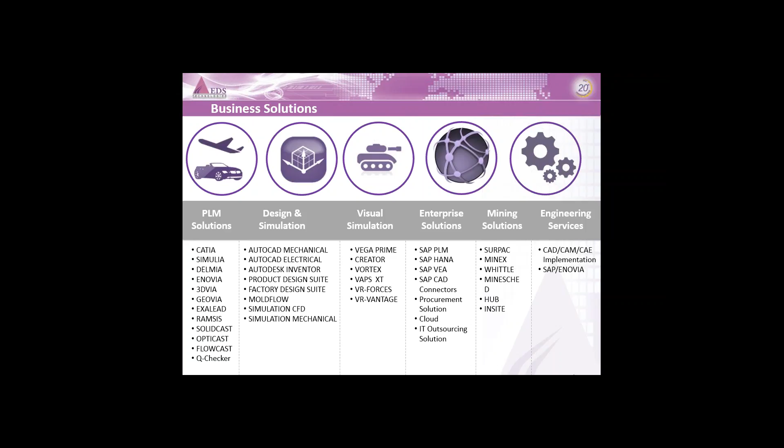We also serve different industry verticals like automotive, electronics, aerospace, heavy equipment, labs, medical equipment, space, and mining, etc. So we have strategic partners like Dassault Systems, Autodesk, SAP, Finite Solutions, Human Solutions, Presagis, and other companies. These are our strategic alliances.

Coming to mining solutions, we serve for Dassault Systems GEOVIA. GEOVIA was previously Gemcom software prior to its acquisition in 2012. Now it is a part of Dassault Systems, which is a 3D experience company. The main objective is to model and simulate our planet, improving predictability, efficiency, safety, and sustainability throughout the natural resources sector. GEOVIA has different products like Surpac.

Surpac is the world's most popular geology and mine planning software used for metal, base metal, and other non-stratified deposits. The other product is Minex, also a mine planning software for coal and other stratified deposits like bauxite, phosphate, limestone, etc. Whittle is the world's most trusted strategic mine planning software used to determine and optimize the economics of open pit mining projects. MineSched is the most innovative scheduling software used to schedule open cast and underground mines for short-term or long-term scheduling.

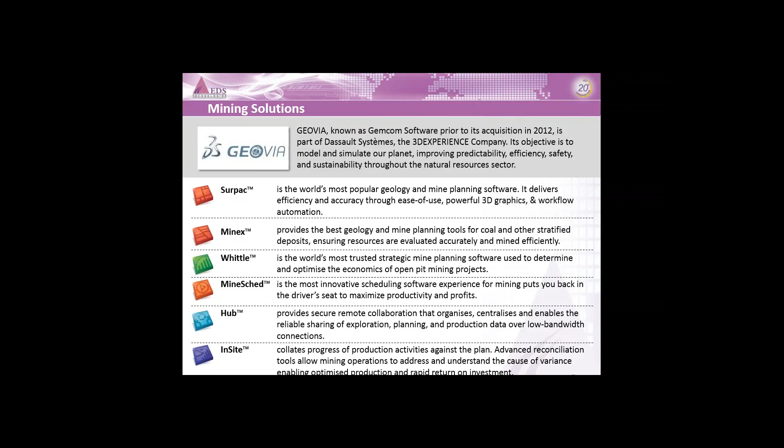Coming to our main agenda, we will have an overview of the new features introduced and other enhancements done in GEOVIA Surpac. This will cover a demonstration of new resource estimation features, block model estimation and enhancements, followed by block model converter, wireframe tools, DraftSight, mesh tools, and other enhancements or fixes, and we'll conclude with a question and answer session.

Well, to increase the confidence within your estimation process through inverse distance or ordinary kriging, there are two new fields introduced, such as the Weight By a field and Desc field, and you can include composite length for the estimation with smaller samples also.

You can estimate the block model of narrow vein deposits by weighting each composite by its length. The number of drill holes used in estimation can now be stored, and it also enables you to store the true distances to the nearest sample and the average true distance to samples from the block centroid for each estimated block.

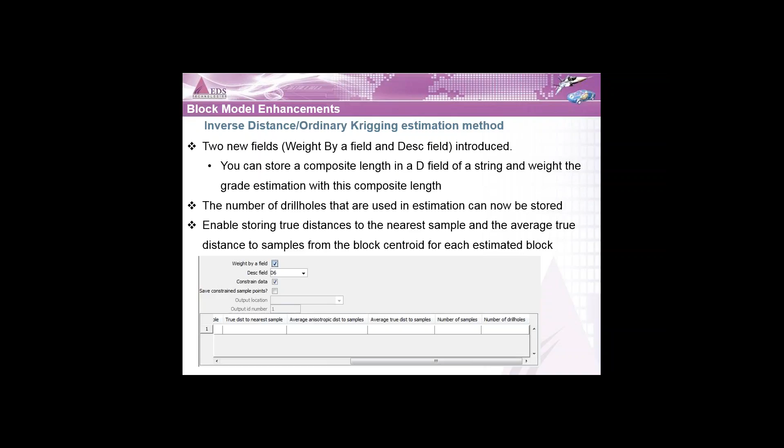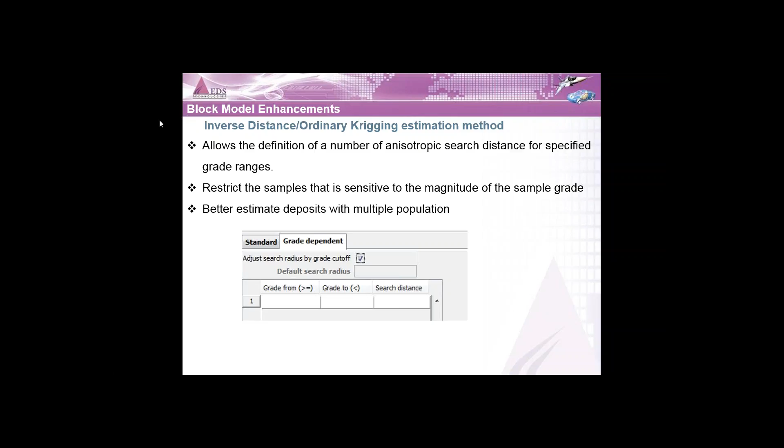It also allows the definition of your number of anisotropic search distance for specified grade ranges. With this, you can restrict the samples that are sensitive to the magnitude of the sample grade during the estimation process. It will better estimate deposits with multiple populations. So we can see the demonstration of how it will be used to search for different grade ranges. Let's go to the demonstration.

Well, this is the Surpac window, and this is my composite file for which I will be doing grade estimation.

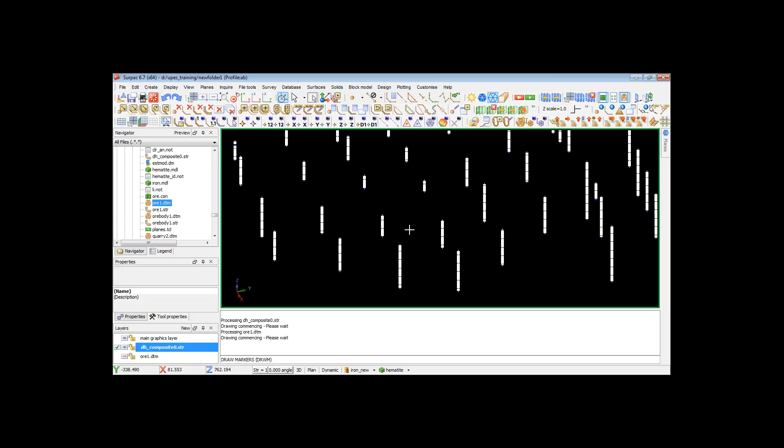Here you can see string one, that is white string. These are the regularly sized, user-defined size composites, and string two are irregularly sized composites. These irregularly sized composites are almost smaller than the regular sized composite, that is the defined composite length. These are generally called the remnants of the ends of the composite interval.

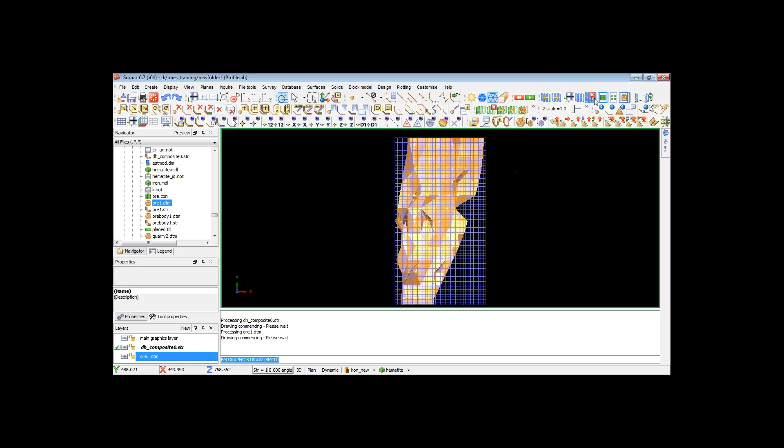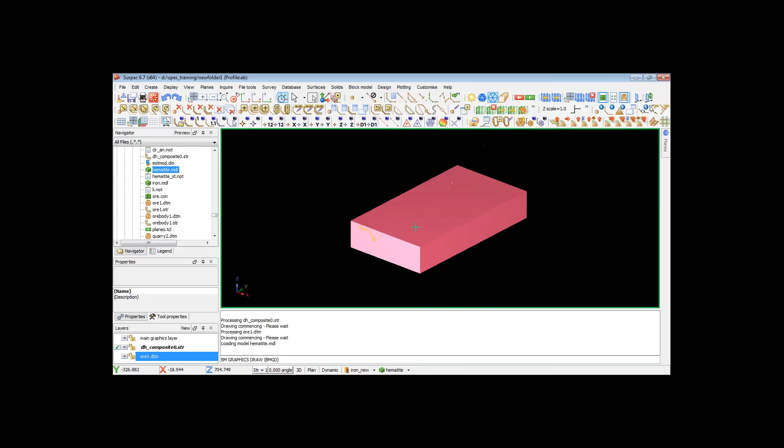This is my ore body, which I will be doing estimation on. And coming to block model, this is my block model. Sorry, I will be opening it again. This is my block model, and this is my constraint to constrain the block model within my domain.

So coming to grade estimation with inverse distance, I will select block model estimation and inverse distance. Here I will select my string file, that is the composite string file, and I will select string range as 1, 2, where string 1 are the regularly sized, or user-defined sized, composites, and string 2 are irregularly sized composites, that is remnants of the end of the composite intervals. Using the weight by a field option, we can weight all the composites by the length.

When you create a composite file, in the string file you can see one string where the length of the composite is stored. So you can use that composite length here. It allows you to correctly include them in our estimation.

If I choose to enable this option, it allows me to enter the anisotropic search distance for specified grade ranges. Here I will give default, select from 45 to 55, giving search distance as 50. From 55 to 65 the distance will be 40, and from 65 to 68 the search distance will be 30.

So with this you can configure your estimation. You can adjust the search radius by grade cutoff ranges.

And coming to the standard form, here you can give your maximum search radius, that is the default search radius, giving it as 100. Maximum vertical search radius—so you can see here the constraint by drill hole.

This option enables you to decluster the data and allows you to limit how many samples to be used in one drill hole. This is used for declustering of your sample data. Here you can select the maximum number of samples per drill hole. I'm not enabling it here.

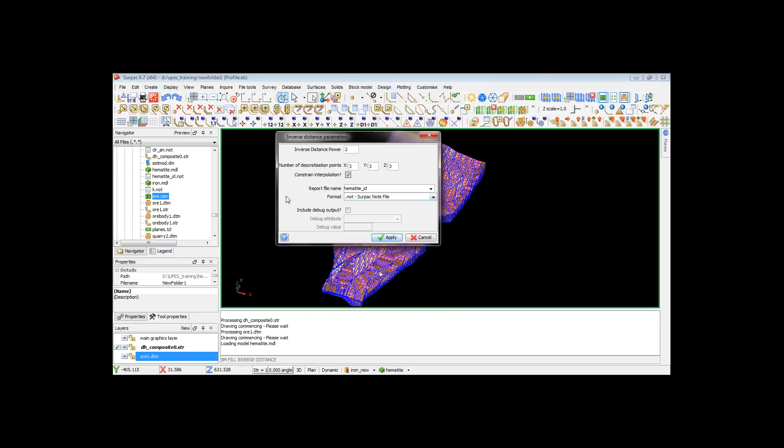So coming to inverse distance parameters, I'm selecting my power and discretization points, and I will choose to constrain the interpolation. Here you can see the report file name—by default it will be your block model file name with your ID. And I'm selecting format as Notepad, hitting the apply button.

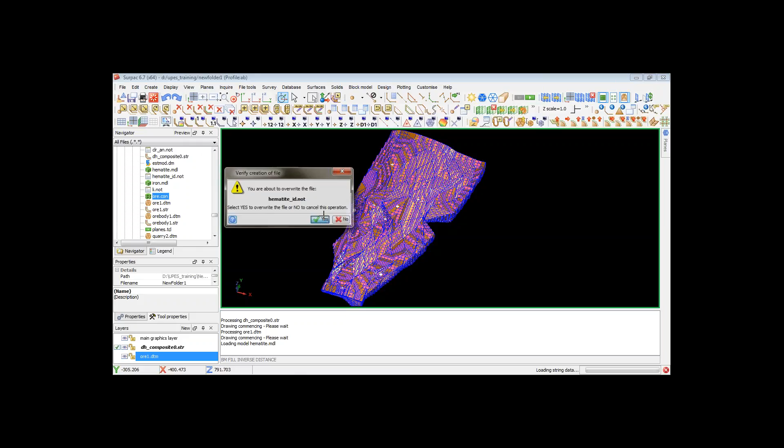Yes. And here we'll select my constraint that I have created. Add the constraint and apply.

Okay, and these are the inverse distance parameters form we have entered. So from 45 to 55, I had given search distance as 50; 55 to 65, 40; and above 65 will be 30.

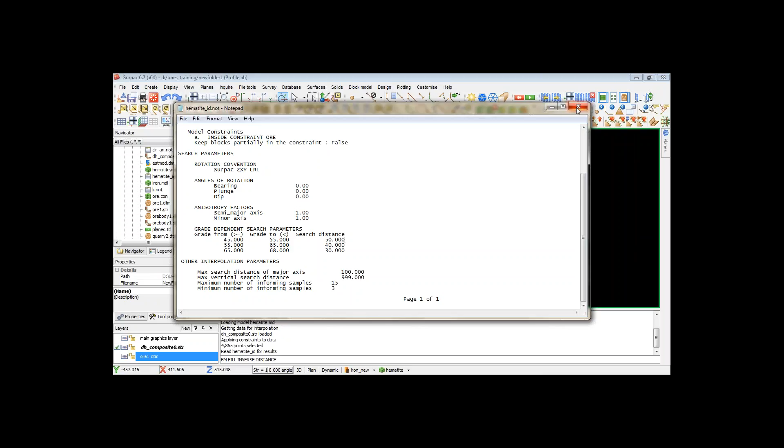So I just want to talk about block model processing. Coming to our presentation.

Block model processing. Most of the Surpac functionalities are multi-threaded. Multi-threaded means when you try to perform the estimation, it actually uses all of the cores or processors available on your machine. This greatly speeds up the processing.

Surpac has been enhanced to use multiple cores when processing your Surpac block models, dramatically reducing your processing time. The majority of the block modeling functions include this enhancement, with performance improved for your estimation process, like inverse distance, ordinary kriging, simple kriging, or nearest neighbor method.

Or for any estimation through partial percentages, and to perform any block maths.

I can see that one of the persons has a question. Yes, Rajkumar. Hello.

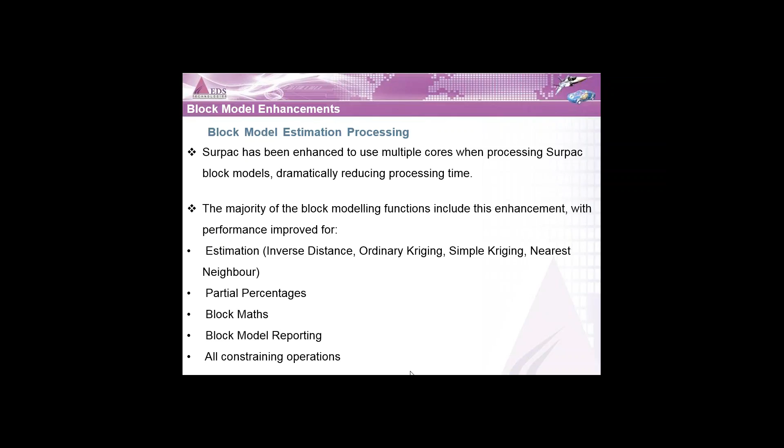Coming to the search ellipsoid, Mr. Rajkumar has a question regarding that.

So if you have any more questions, I will answer you after the presentation. And coming to our presentation.

Next will be block model converter. Block model converter is a utility for processing block model data used in mining applications. Block model converter supports a variety of block model files for both input and output.

Coming to the demonstration, this block model converter you can open from here: go to block model, and convert and reblock. When you select convert and reblock, block model converter will open in another window.

Here you can open the block model, and here you can see the block model name, stored block count, and user block count. The difference between stored block count and user block count is: the number of blocks is based on the user block size which we give, and the stored block count is based on the physical size of the block model.

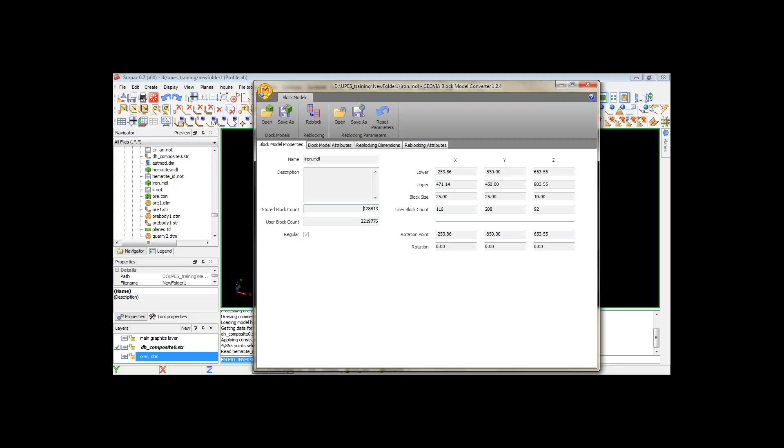The stored block count uses super block values for a block model when all of its immediate neighbors have exactly the same value for all attributes in the model.

So these are my stored block count and user block count, this is the difference, and this is my rotation point, and these are the block sizes for this block model. You can see the block model attributes here, and in the reblocking dimensions, you can enter your reblocking dimensions.

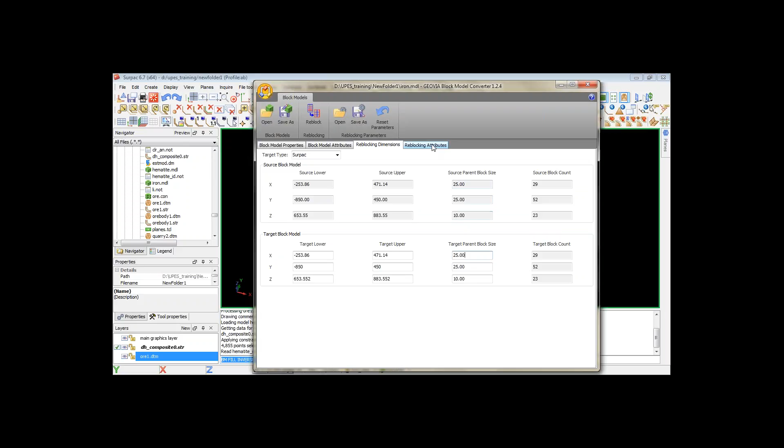That is, source block count is 29, 52, 23, and you can change the target block count by varying your target parent block size. And in reblocking attributes, here you can select which of the attributes to be added in the reblocking process. If you want to add all the attributes, you can add all the attributes.

After that, you can select reblock, and you can save it in various formats: that is, .mdl Surpac block model, or DataMine block model, or free block model. You can even save it in .csv format.

And coming to the presentation, the block model converter allows you to reblock block models from other mine planning softwares like DataMine and Vulcan.

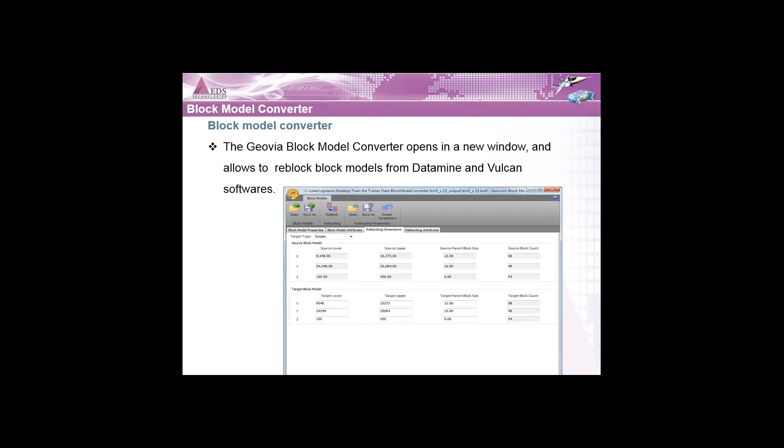So after importing your block model from other mine planning softwares, a new file will be created, with extension .fbm, meaning free block model. Now it allows you to correctly handle attribute names which have more than 8 characters, calculated attributes, integer attribute types, and the rotation of your block model.

Coming to viewing planes, the viewing planes can be used for a number of tasks. Geologists use planes to view vertical cross sections of drill holes and surface topography, while engineers use planes to view horizontal sections of a block model while creating a pit design. Surveyors use planes to create cross sections of areas which have been mined to display.

You can use viewing planes to examine sections of data in graphics. These planes can be saved as a string file. You can save the section file as a string, and view different planes in different viewports. I will show you a short demonstration of planes.

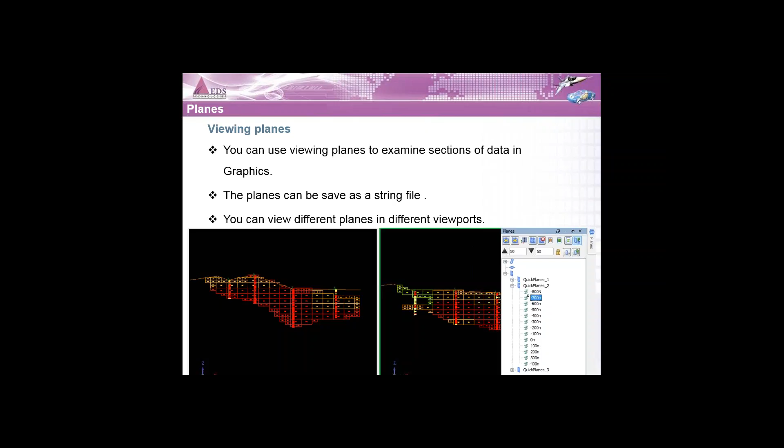I'm exiting this. So here when you open the Surpac window, on the right side you can see a window called planes, with multiple options. The fourth icon here is for quick planes. When you select quick planes, you can select your orientation. Before that, I will open my files.

So this is my ore body with drill holes. I will show you the planes applying on this. Coming to planes, here you can select your orientation, like I'm selecting northing. You can give your start and an interval. By default, it will select the extent of your data in the layer, and then select interval as 200.

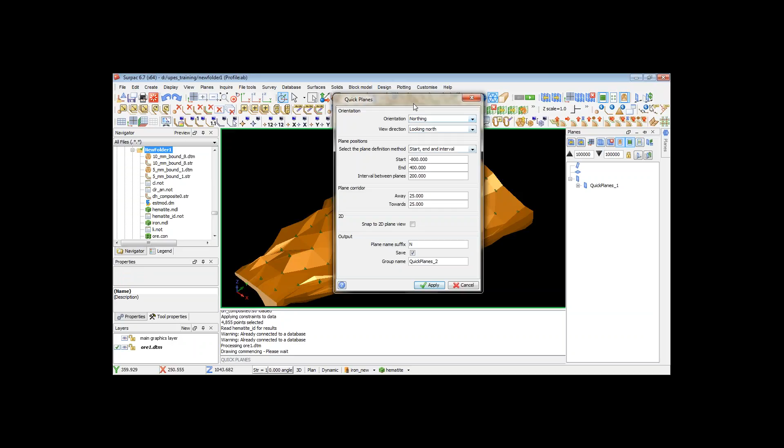There is an option here, snap to 2D plane view. When you select it, you cannot rotate in 3D, you're only able to view in 2D. When you unselect the option, you can rotate the data in 3D. You can save these quick planes in a file, giving a name. Just apply the button.

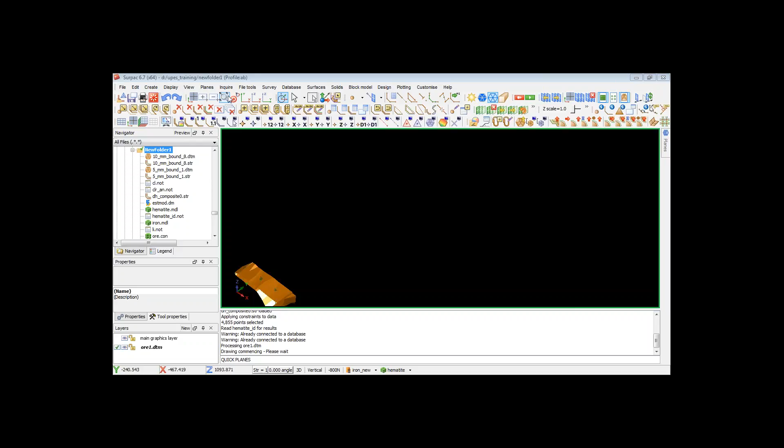Here you can see these are the sections. So one by one, I'll be showing you. This is the top view, and this is your section view.

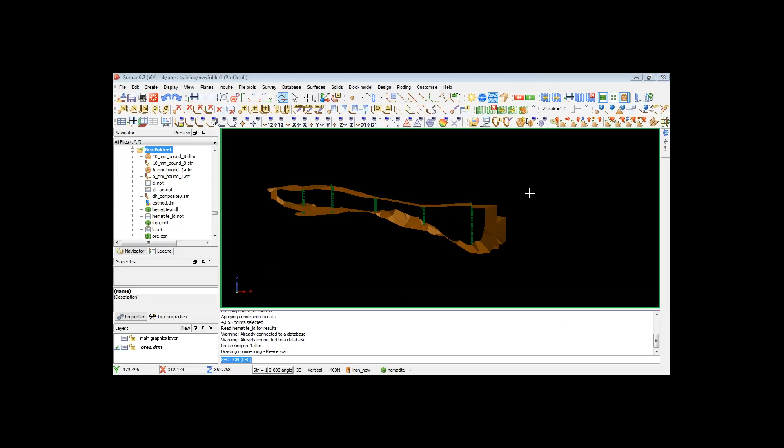As I told you, you can view different sections in different viewports. So I was splitting this viewport into 2 viewports. In one viewport I have the section of -400, and in this viewport I can see -300 section also. You can see different orientations in different viewports. So with this, you can see your sections in different viewports.

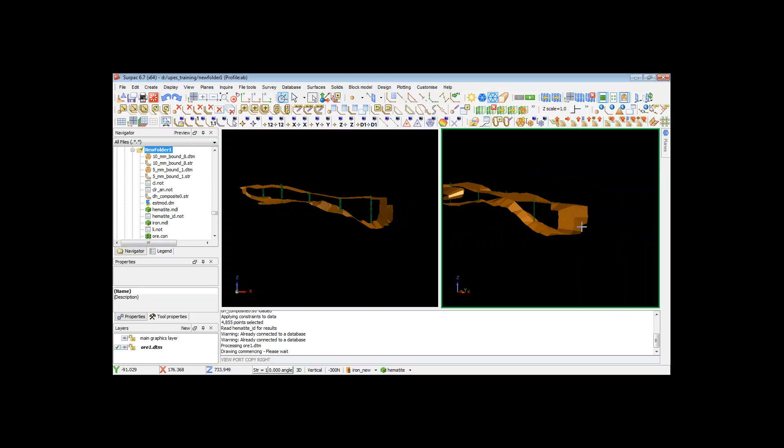You can again split this into horizontal also. You can display grid also, and also display the dynamic 2D grid to view your section data. So this is about viewing planes of your drill data on the solid file.

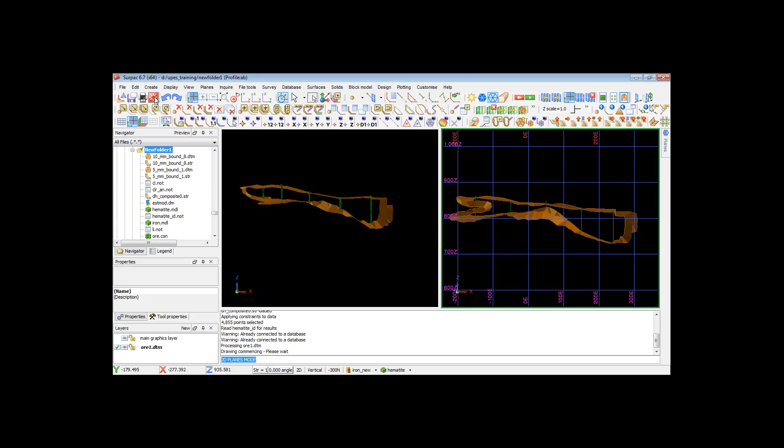I will show you the quick planes of a block model. So this is my block model. Earlier we have estimated the grade estimation through inverse distance. There we have added some new features like true distance, average true distance, and number of samples.

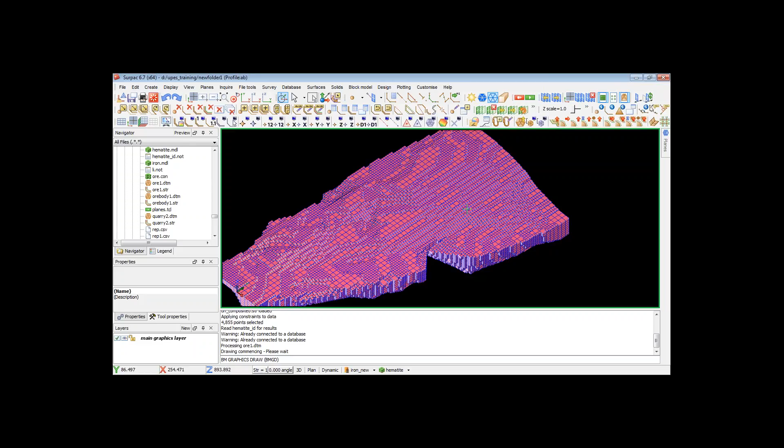Coming to quick planes, I'll be showing the quick planes for you. Selecting orientation or elevation. The viewing of block model in quick planes is used for pit design generally. So you can display the attributes, model attributes data in section itself by selecting this icon, that is display attributes and sections.

Here I am selecting attribute FE. You can select your position also, and size, text size, and your units, and the font size also you can change. So I'm applying. Here you can see block model attribute values can also be seen in sections like this. Different sections you can see your block model attribute values. These will be most helpful during your pit design operation.

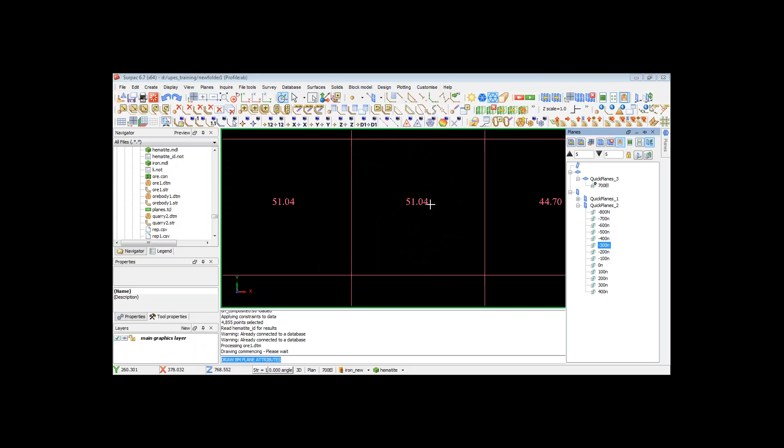Now I will show you how a section file can be saved as a string file. For that I will bring pit designs. So these are the pit designs for the 5th and 10th year. I will be taking a section using quick planes. Previously we have seen orientation in northing and elevation. Now I will use oblique orientation.

You can save the section file from planes, save section to string file. From here, you can save your section to a string file. Just select it, give a string name, apply, with the caption. Here you can see the section which you have used. Now, save as section file.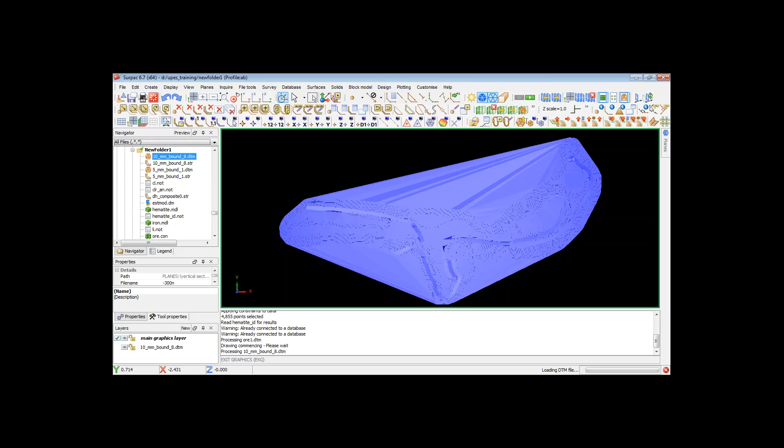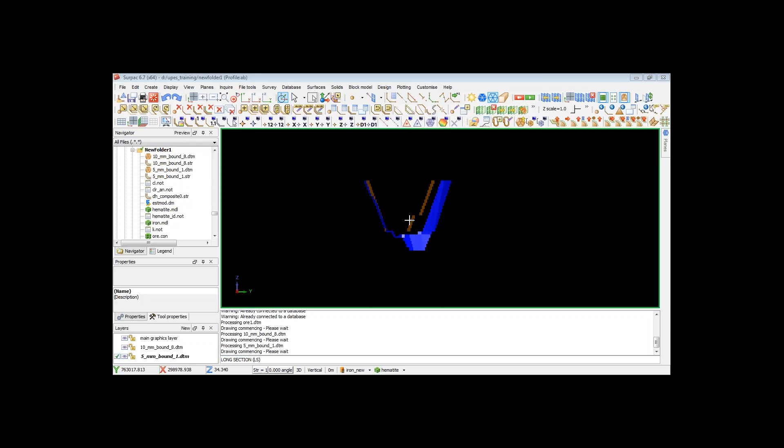Coming to DraftSight, DraftSight is a Dassault Systèmes product, and it is a 2D design package with a wide range of plotting markup tools, a layer manager, and the ability to send plots to .dxf, .dwg, and .pdf file formats. DraftSight is another example of the advanced technology and innovation being brought to the mining industry by Dassault Systèmes.

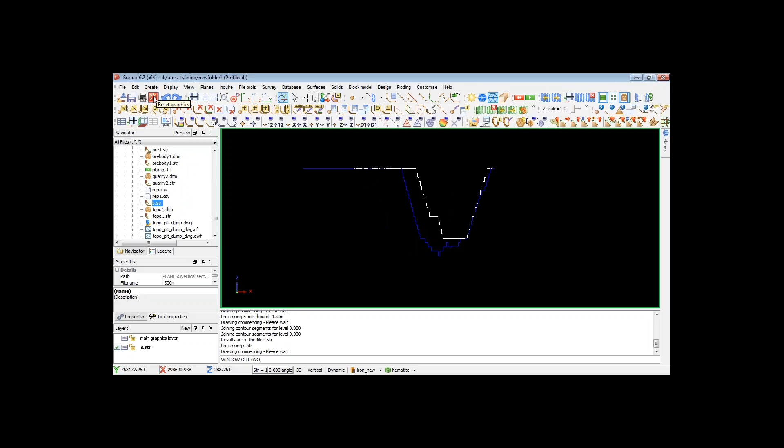Whenever you are creating a plot file in Surpac, it directly opens in DraftSight, as DraftSight is now integrated with Surpac. So there is no need to use other CAD software because DraftSight is directly integrated in Surpac, and you can view your plot file directly in DraftSight. There you can edit or modify your plot file.

I will take one example. This is my plot file. You open the plot file, and it directly opens in the DraftSight window. So this is my plot file. In DraftSight, you can add any text, or you can modify any line or polyline.

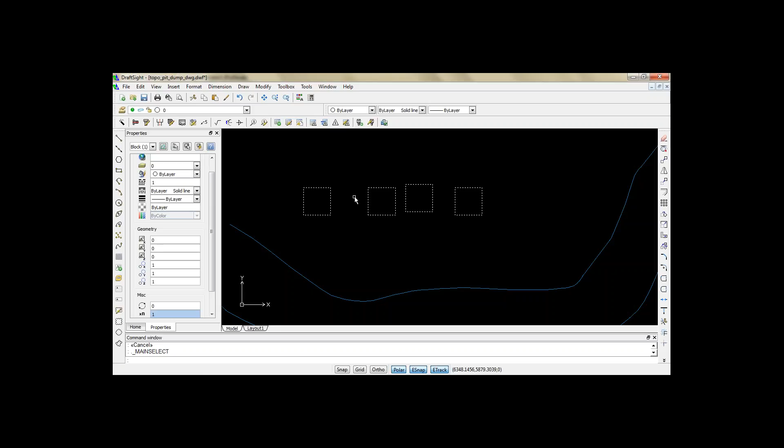And you can explode them also. You can make individual blocks with the explode option. You can see the explode.

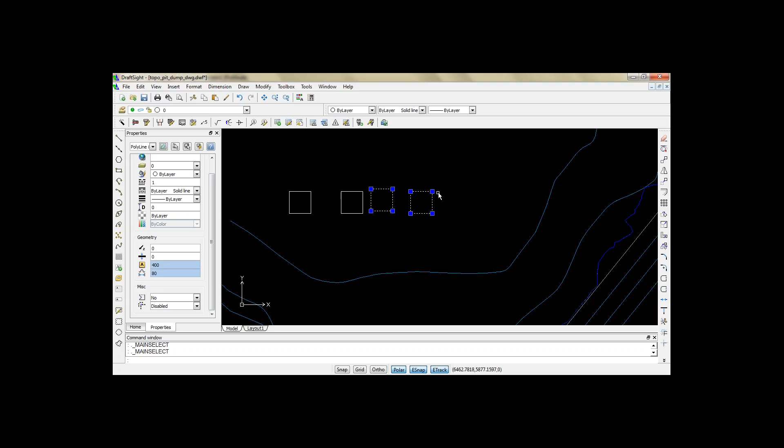You can include your dimensions also for calculating any distance between them. You can add dimensions in an aligned manner. Like this way, you can add dimensions here.

Or if you want to draw any arrow, that is here called a leader. For this, type LE, and you can add an arrow. You can type a name here, and you can add an arrow here. If you want it, you can explode it.

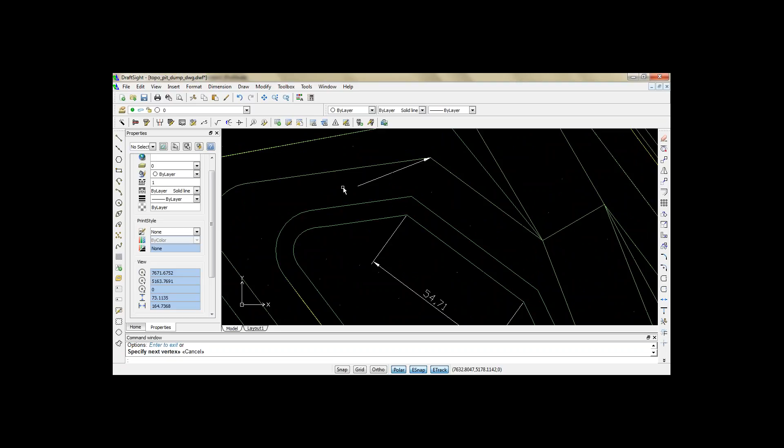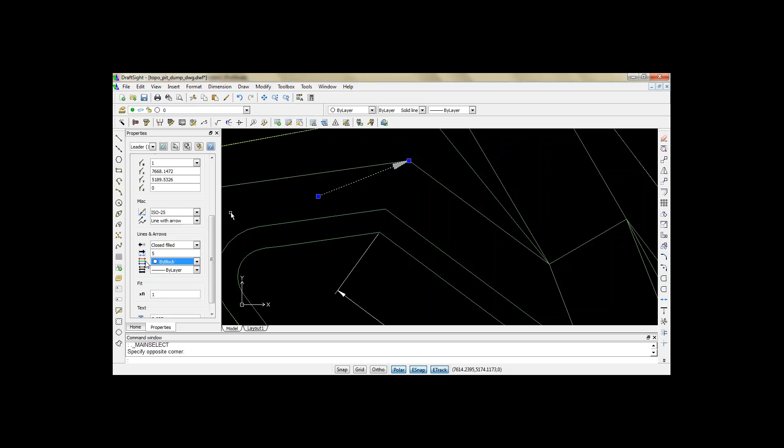You can increase thickness from here. On the left side, you can see different properties of it. Here you can change your line or arrow thickness by varying the thickness here. You can see it like this.

You can do various 2D package operations here. It's a very easy software, very easy to learn. Here you can even edit your title box also. Right click it, and instead of GEOVIA, you can type your company name.

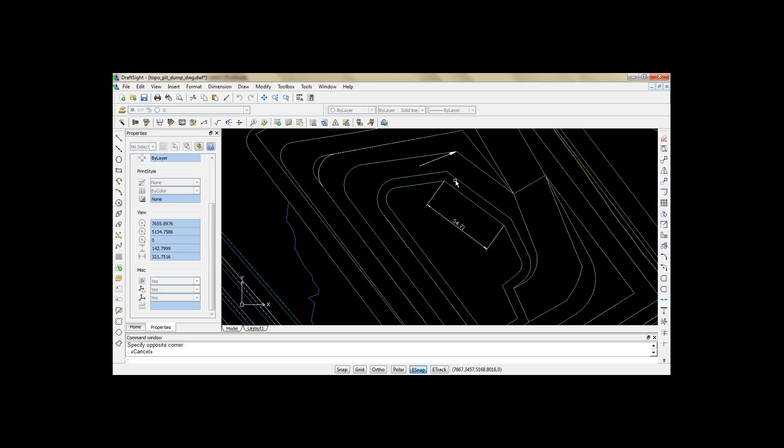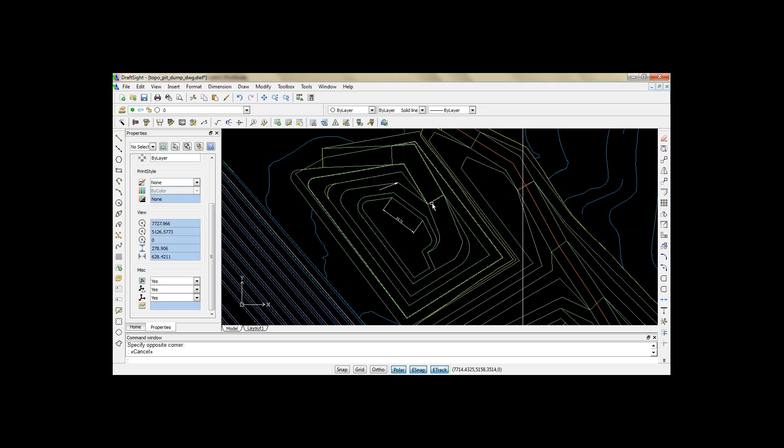So this is about DraftSight. And coming to our presentation, coming to mesh tools. In mesh tools, there are 4 different tools. One of the tools is linear clearance analysis.

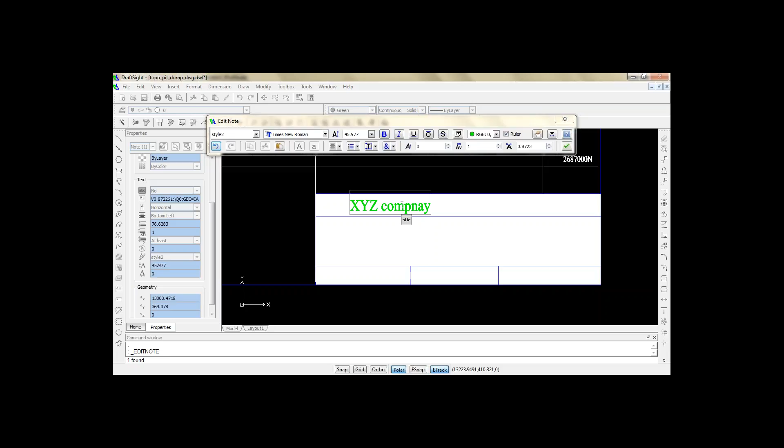This linear clearance analysis is used to determine the distance between solids or surfaces and other solids or surfaces and drill holes or segments. If intersected, the intersection is displayed in the graphics in the color you mentioned, and if the solids or surfaces do not intersect with each other, the line of closest approach and the minimum distance is displayed in graphics.

I will show you a simple demonstration of linear clearance analysis.

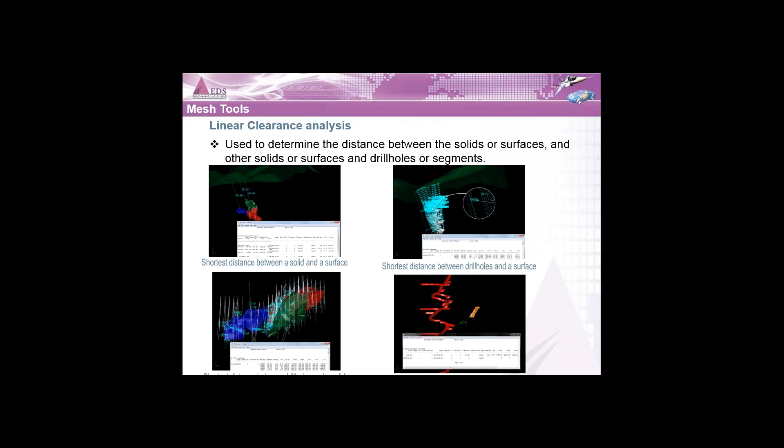For this, I'm going to open topography and orebody. So you can see this is my topography and orebody. I will calculate linear clearance analysis here.

So for this, you can select the function through Surfaces Mesh Tools or from Solids Mesh Tools. Use Linear Clearance Analysis. By default, it will show you the layers whichever you have opened in the graphics. Here you can see my topo and orebody layers are there, and these objects are selected.

And here you can give maximum clearance to show. You can limit the data here. You can select the color for intersection. You can select the different color for clearance color and the line pattern, marker style.

If you want to save the data which is displayed in the graphics, you can give file name, then format. The format is the notepad. You can use different formats, as you can see here.

You can see these two objects are intersected, so it is showing in red color as we have given the red color. The line is showing the dotted line, showing the clearance distance.

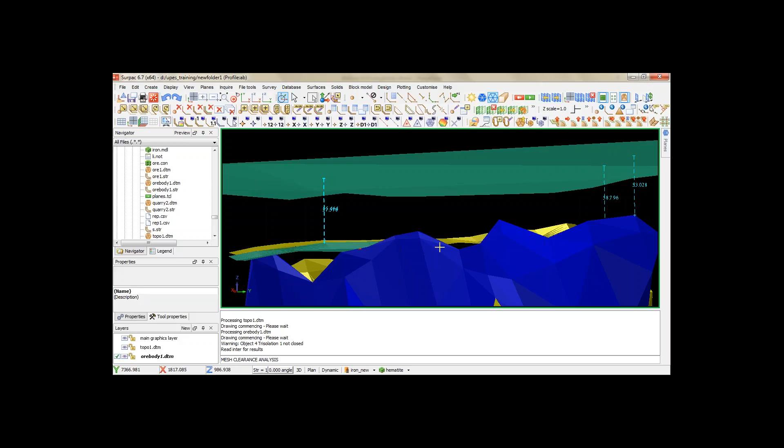So this is the line of closest approach and the minimum distance. And here, in the report form, you are able to see the clearance distance for each object, the bearing and dip for those objects also, and your x from and y from and z from, to x, y, z.

So in this way you can do your clearance analysis and generate a clearance analysis report and presentation. In this way you can calculate your shortest distance between any solid and a surface, or between drill holes and a surface, or between drill holes and a solid, or between any two solids.

Deviation analysis is also one of the tools of mesh tools, generally known as boundary analysis or mineralized boundary analysis. This function can be used to analyze the difference between two solids and surfaces.

It is used to determine safety boundaries when an open pit mine approaches existing underground workings. This method can also be used to compare a planned and mined underground drives to determine where insufficient material has been excavated or where more material has been removed than planned. With the help of deviation analysis, you can know all this data.

Coming to the next mesh tool, that is expanding or contracting solids. With this function, you can expand or contract, or both. You can expand or contract a surface by a set distance, to create a valid solid by expanding both sides of a surface and closing it.

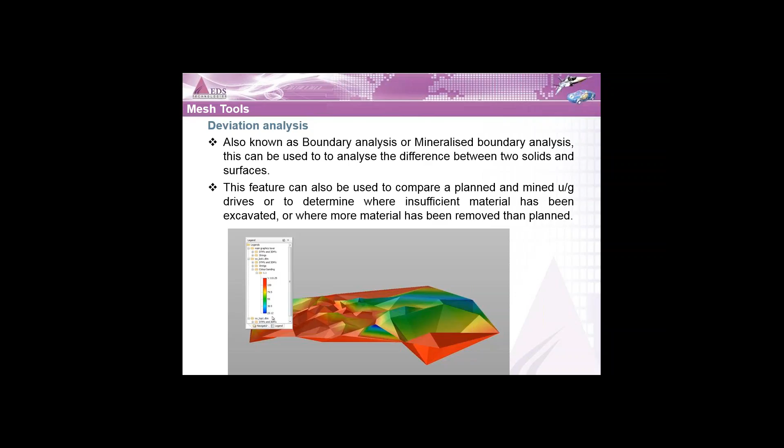I'm going to show a short demonstration of that. I'm going to select my topo. This is my topo, and I'm going to expand it. Select Solids, Mesh Tools, and Expand or Contract.

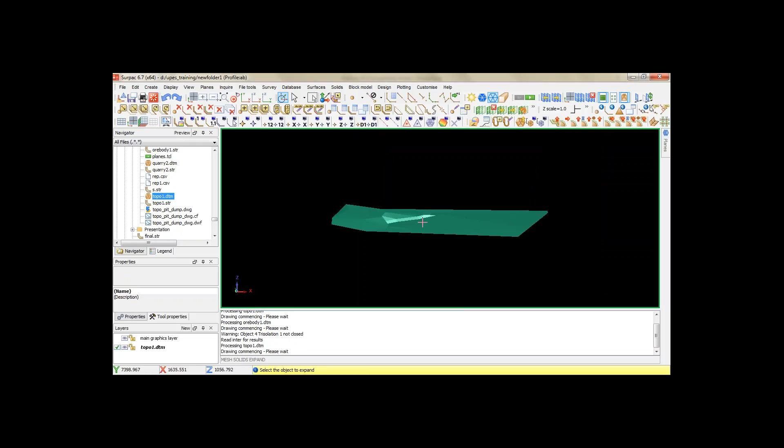I'm selecting my object range by the select button. It allows you to select your object. Here you can view your expansion distance, 50, and you can set your precision also. You can either override the existing file or you can create a new layer.

And the simplify results: if you select the max side, it will reduce the number of triangles in the file. When you go to the minimum side, it will increase the number of triangles, but it will not compromise on the geometry.

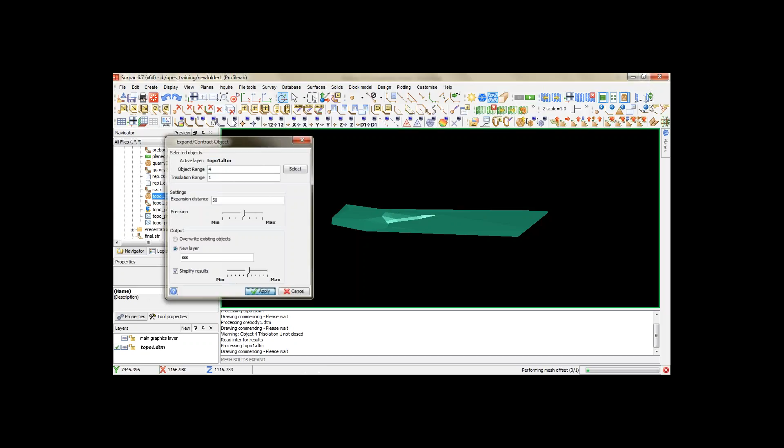You can see this is expanded. You can either select this solid also, and I'm selecting this file, Surfaces, Mesh Tools, selecting an object and expansion distance.

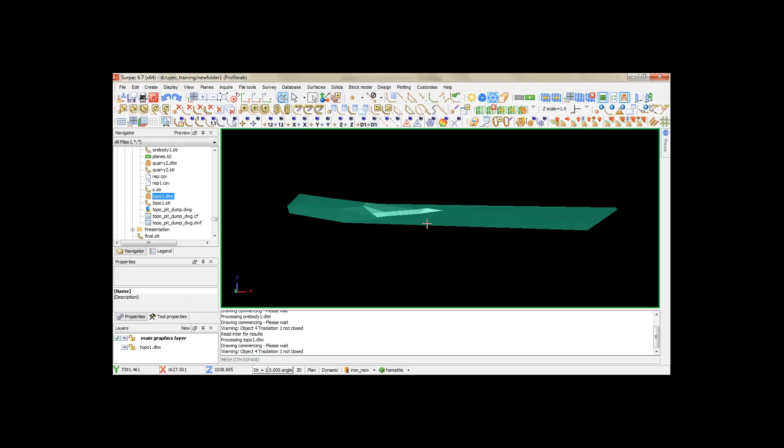You can select here. Earlier I had done only a single side of the surface expanded. When you give the positive data, it will expand; when you give the negative data, it will contract. I'm selecting now both sides and as solid also. I'm overwriting this file.

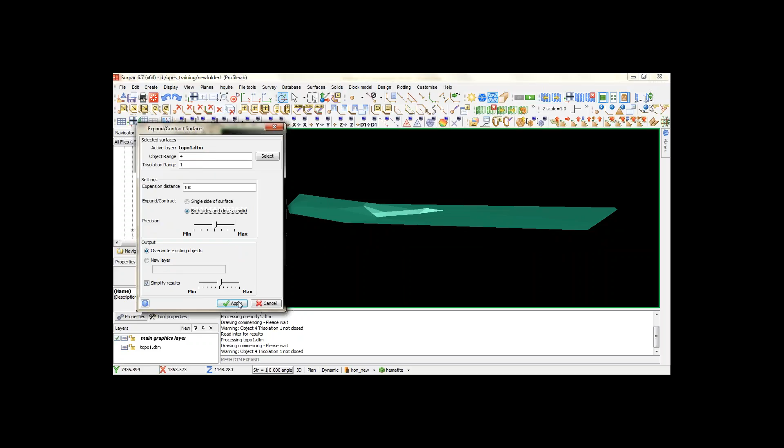Here you can see the topo is expanded and became solid also. So in this way, you can expand or contract a surface and make it a solid.

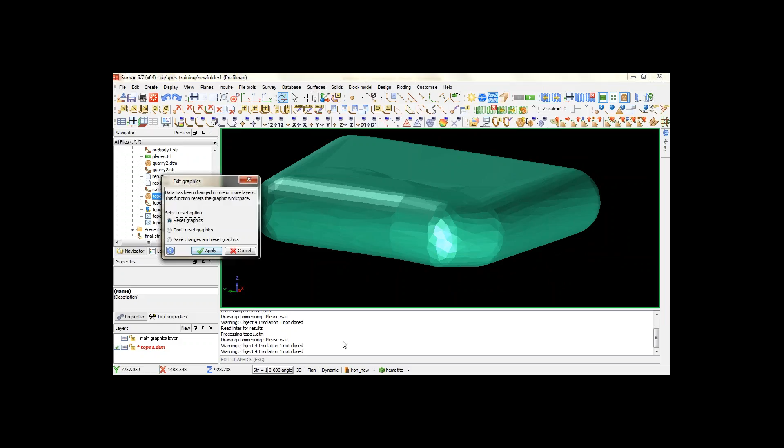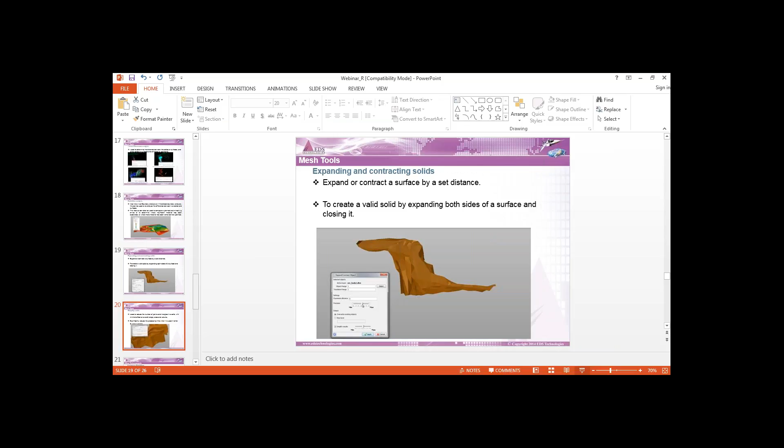So I will show you the demonstration of this. Let's say this is my solid. If you have any complex solid, you can simplify it. For simplification, go to Solids, Mesh Tools, and Simplify.

And you can select Object, or you can select it if it has different objects, then you can select Object Range also. Selecting one object only, and here you can set Simplify Minimum and Maximum.

If I am selecting Maximum, by displaying triangles it will let you know the number of triangles present.

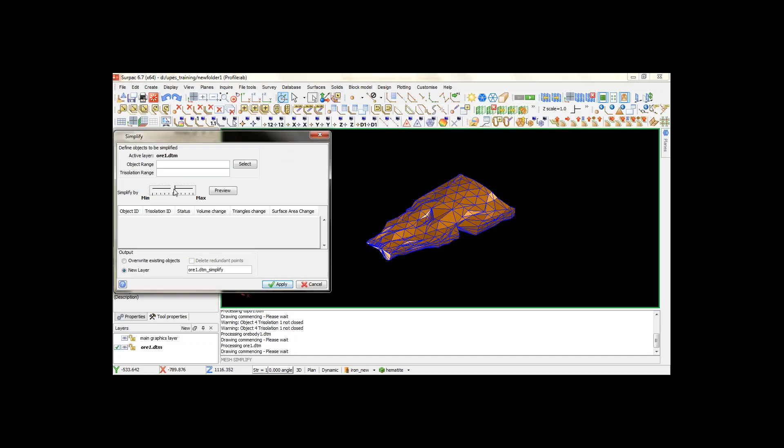Now I'm selecting Simplify, selecting maximum simplification, and you can see the preview also. Hit the preview button and it will show you the volume change, triangles change, and surface area change. If you are trying to reduce the number of triangles, these will be the changes in volume, triangles, and surface area.

On minimum side, you can see the number of triangles increased, and there is a change in volume also. With this, you can simplify your solid or any object, and you can overwrite this object or save it by creating a new layer.

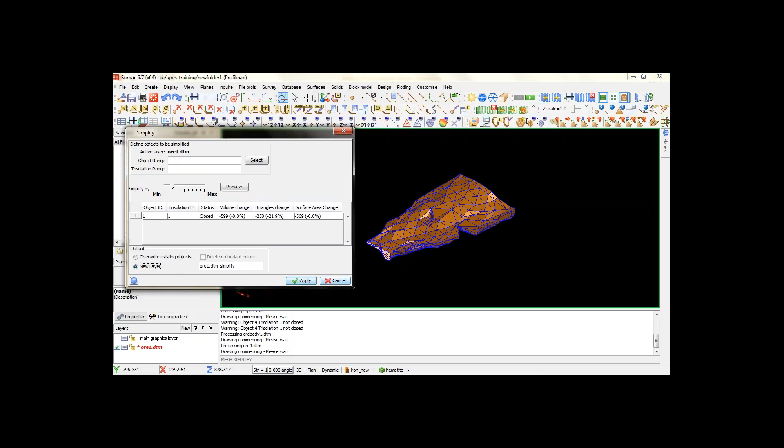So these are about mesh tools. We have covered block model estimation enhancements, quick planes, block model converter, and mesh tools.

Coming to other enhancements, when you are using variogram modeling and indicator variogram modeling, you can now use a rectangular search area shaped like a pyramid. Earlier, you used to do variogram modeling with the search type cone only. Now a pyramid shaped search area can also be used during your variogram modeling function.

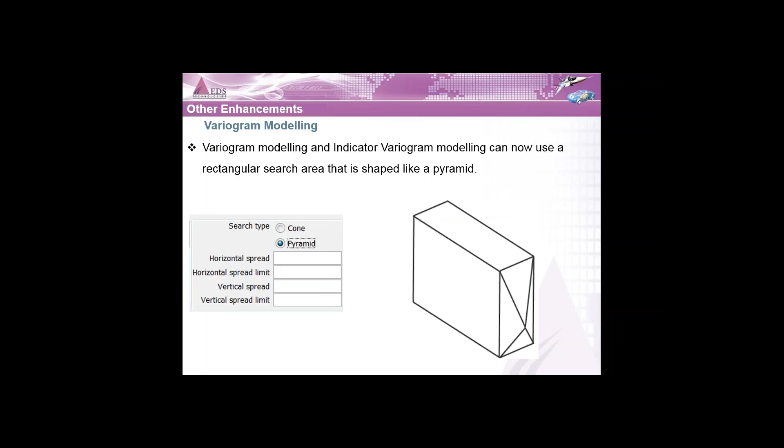The other option you can choose is pyramid. The area that variogram uses for the search is in the shape of a pyramid, and it can be limited in length depending on the horizontal spread limit and the vertical spread limit setting that you enter. You can extend a rectangular prism from the base of the pyramid for a specified maximum distance. Pyramid is useful if you need to increase the height or width of the search area, rather than having a search area that extends equally in all directions.

So this is one more enhancement from a geostatistics point of view.

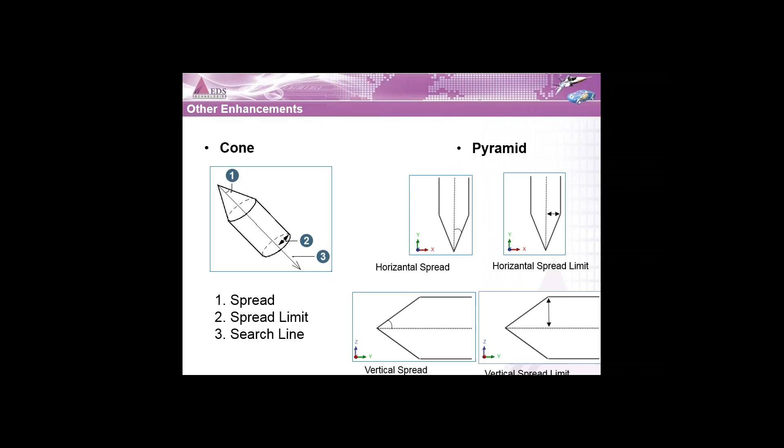The other enhancements are: your navigator shortcut menu is reduced, by converting the following menu commands into shortcuts - cut, copy, paste, rename, delete, and properties. And the tracking mode is also introduced, to create a point at a precise angle or any distance from another point or active plane.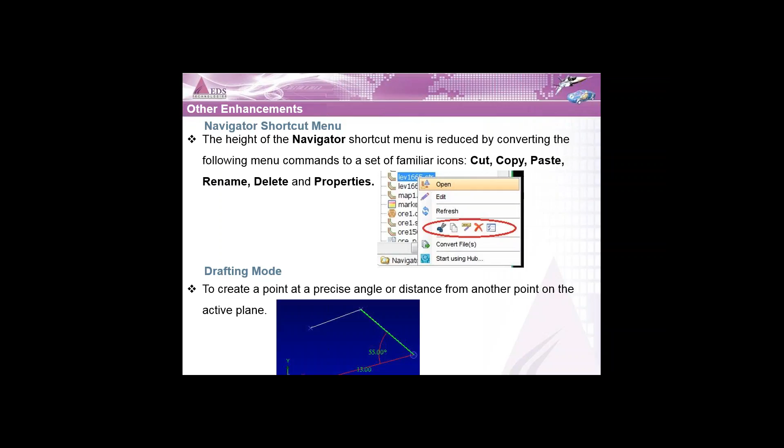So in the back window, this is the navigator menu sorted. Shortcuts are cut, copy, paste, rename, delete, and properties. So the length of the navigator menu is reduced.

Coming to drafting mode, you are trying to digitize any point. Here you can see drafting - by selecting snap with a drafting ruler, you can actually draw or digitize a point based on angle. This is similar to any CAD software.

Using this, length is also increasing and angle is also changing. So this drafting tool is used for creating a point at a precise angle or at any distance from another point.

The other enhancements are: the maximum length of attribute name in a block model file is now increased up to 128 characters. Earlier it allowed you to enter only 30 characters. Now you can enter up to 128 characters when creating any attribute in the block model.

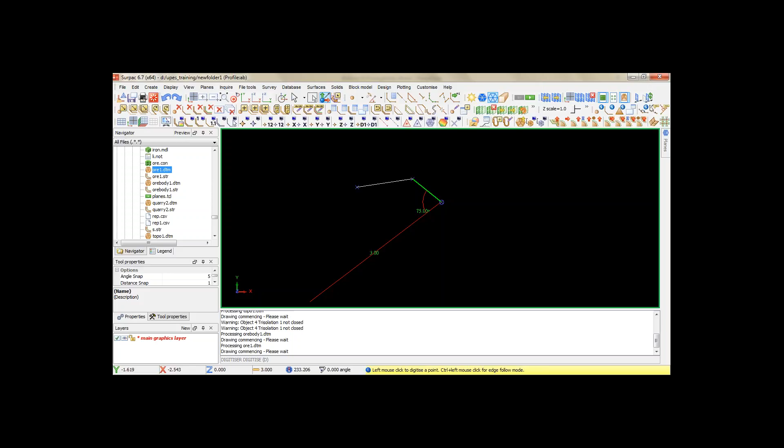Other enhancements include third-party software upgrades. The version of the third-party software products Surpac uses has been upgraded.

And Surpac has been upgraded to use a new TCL version also, that is version 8.4.18.

The installation of Surpac 6.7 or 6.7.1 is not supported on Windows XP and Windows Vista. If you attempt to install Surpac 6.7 or 6.7.1 on these operating systems, a message appears informing you that the operating system is not supported and the installation is cancelled. Please upgrade your operating system to at least Windows 7.

And GEOVIA has every answer and every solution for your questions - from data, geological database, resource estimation, underground design, dump scheduling, dump design, pit design, blending process, or any pit optimization also.